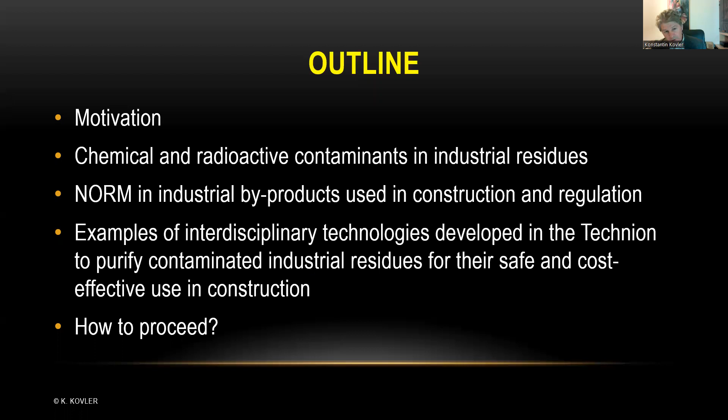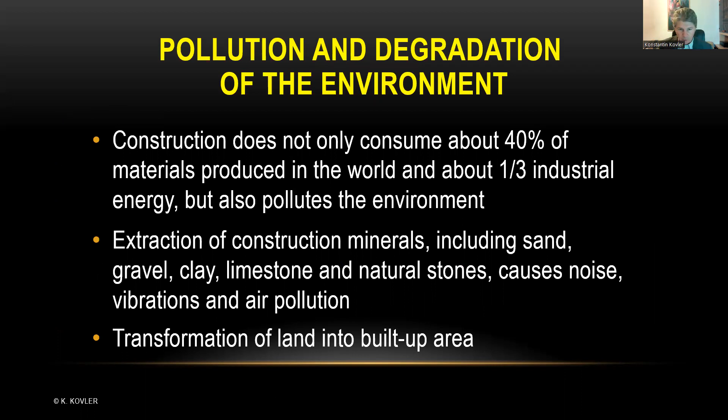Motivation. Let's start with the pollution and degradation of the environment. We know well that construction doesn't only consume about 40% of materials produced in the world and about 1/3 of industrial energy, but also pollutes. Extraction of minerals results in noise, vibrations, air pollution, transformation of land.

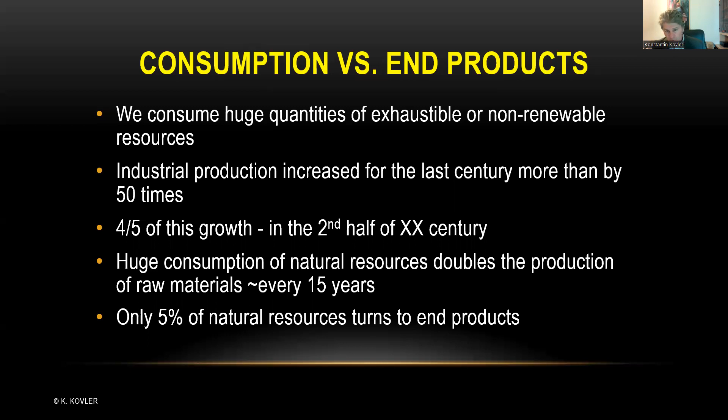Don't forget, consumption versus end products. Yes, we consume huge quantities of exhaustible or non-renewable resources, we know it. Industrial production increased over the last century by more than 50 times, and most of this growth happened in the second half of the previous century. Unfortunately, only 5% of natural resources turns to end products, and the rest goes simply to waste, often ecologically harmful and unsafe. I will discuss in my presentation why recycling is not so easy and what are the pros and cons.

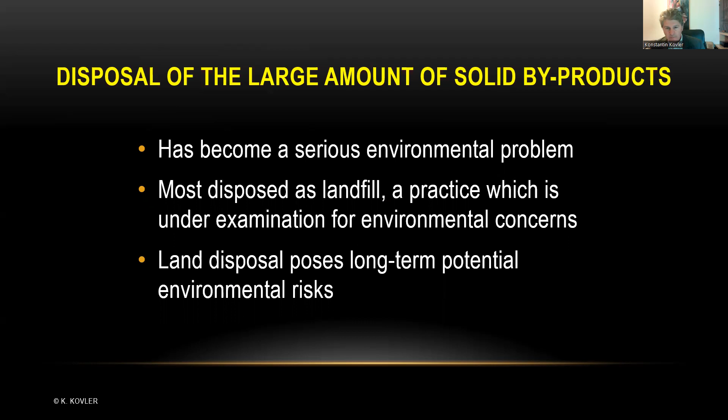Coming back to the disposal of the large amount of solid byproducts. It has become a serious environmental problem. Landfilling is problematic. It's a practice which is under examination for environmental concerns, and land disposal poses long-term potential environmental risks. Our opinion is simple. This waste should more likely be regarded as resources placed in the wrong place.

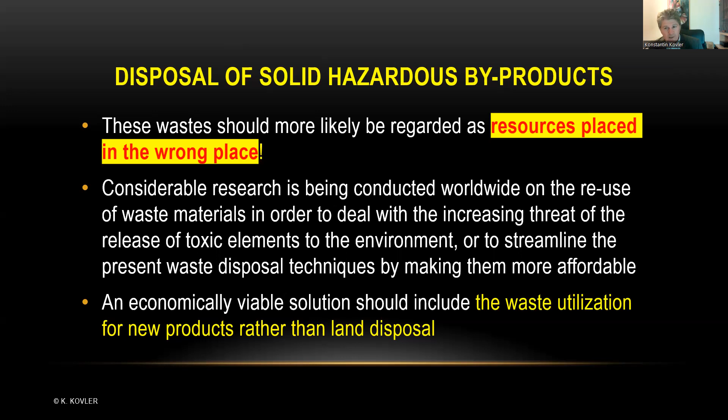So considerable research is being conducted worldwide on the reuse of waste materials in order to deal with the increasing threat of the release of toxic elements. And economically viable solutions should include, of course, waste utilization for new products rather than land disposal. The best way, of course, to handle this toxic industrial waste is to avoid generating it.

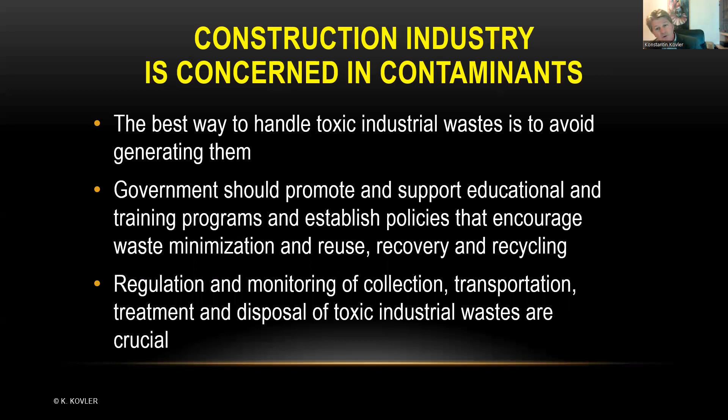Of course, government, we suppose, should promote and support educational and training programs and establish policies that encourage waste minimization, reuse, recovery, recycling, and also regulation and monitoring of collection, transportation, treatment, and disposal of toxic industrial waste are simply crucial.

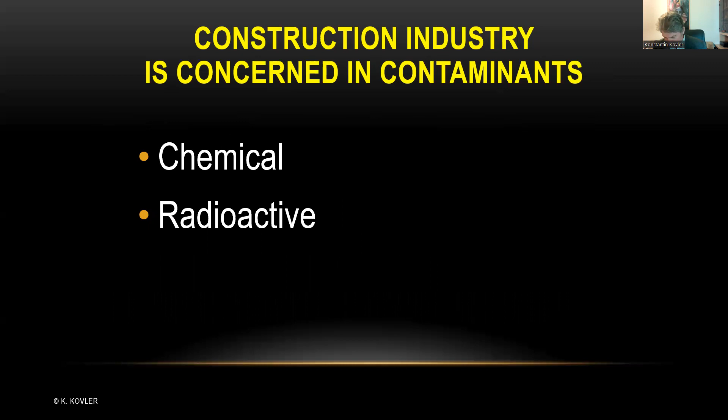Let me speak in more detail about chemical and radioactive pollutants. I will focus on radioactive because very often it's much easier to get rid of chemical pollutants than radioactive. NORM. NORM has a double meaning. Norm is a norm, normative, and NORM is an abbreviation of naturally occurring radioactive materials.

Natural radionuclides derive from rock and soil, and many mineral materials are extracted from the earth, from the rock and soil, and used in construction. I'm not speaking about polymer, wood, and metals; I'm speaking mainly about mineral materials. In the uranium series, the most important and most popular reference is radium. So this disintegration chain of uranium is often called the radium chain.

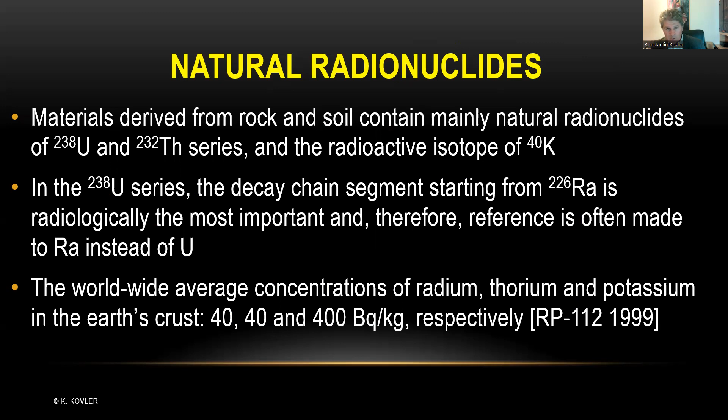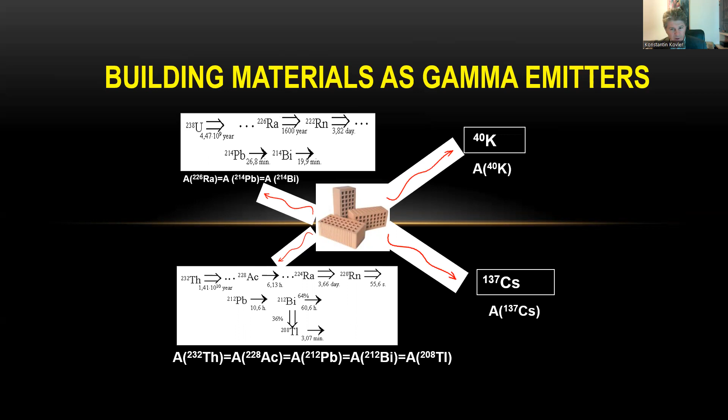The worldwide average concentration of radium, thorium, and potassium in the Earth's crust is 40, 40, and 400 becquerel per kilogram. And building materials are considered gamma emitters because they contain all of them in different proportions, of course. And in some places, mainly in the zones close to the Chernobyl disaster, in Belarus, Finland, the regulation also addresses cesium-137 concentrations. So we are speaking about natural origin and industrial byproduct materials.

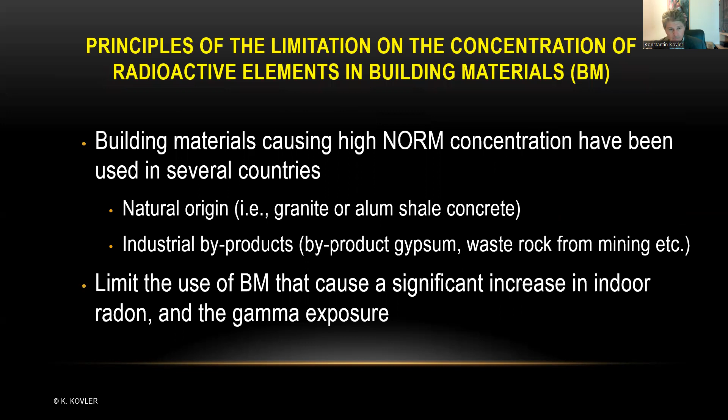And the task of the regulators is to limit the use of materials that cause a significant increase in gamma and also in radon. Because radon, we can breathe it. It's in the middle of the disintegration chain of uranium, and it's the only gas. The rest of the uranium disintegration chain is metals, aerosols.

Enhanced radioactivity is observed in many different types of byproducts, because after some chemical or thermal treatment, the concentration of inorganic matter, including heavy metals and including radioactive metals like radium and thorium, is increased. Among them, slag, different kinds of ash, phosphogypsum, and red mud.

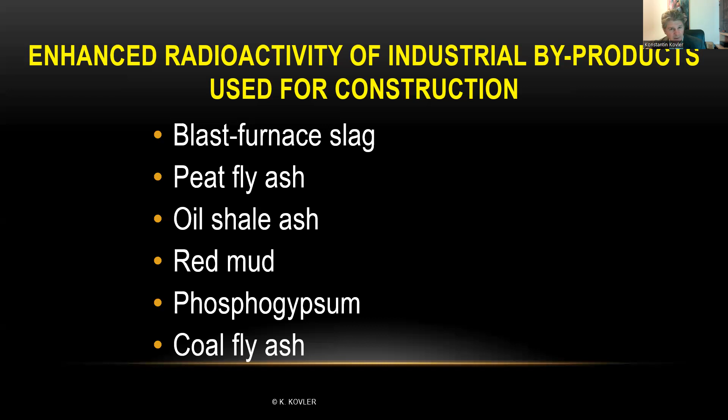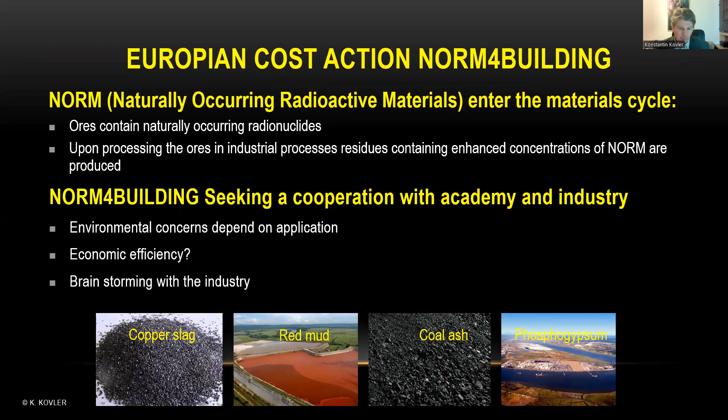Recently finished project I took part in, called NORM4BUILDING, addressed different kinds of industrial products contaminated with NORM. We published a book, I think it's a good book, very popular now, which is called NORM4BUILDING.

Please look at the table taken from one of the European documents, RP 112, and look at the bottom of the table, listing 3 types of industrial byproducts: phosphogypsum, blast furnace slag, and coal ash. They contain much, much higher concentrations of radionuclides than most common building materials in the upper part of the table.

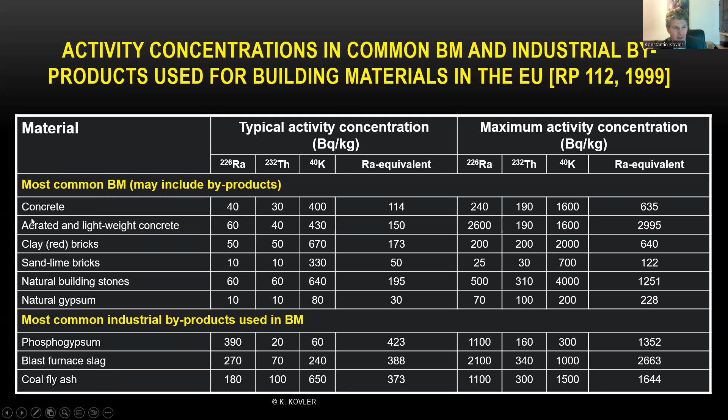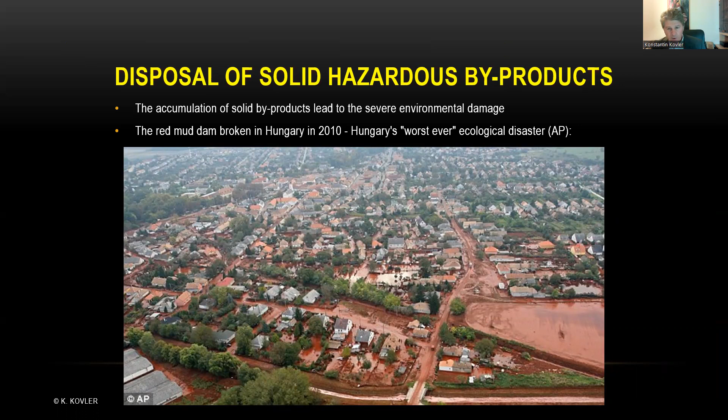Disposal of these solid hazardous byproducts can lead to severe environmental damage, like what happened in Hungary in 2010, the worst ever ecological disaster, when a huge territory of Hungary was simply flooded by this toxic byproduct. Red mud is a highly alkaline residue of the bauxite industry.

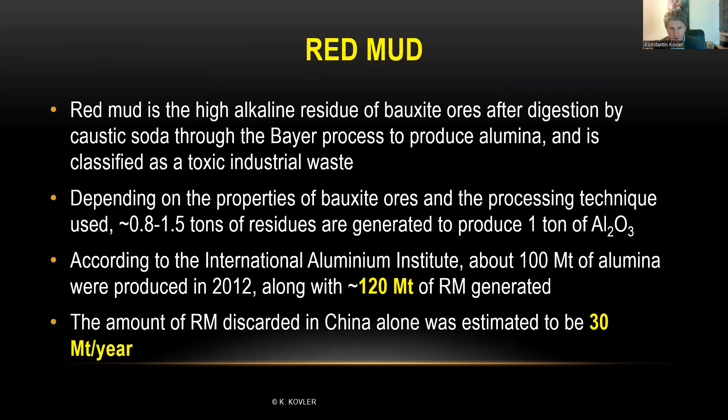And look at the numbers. Only in China, the amount of red mud discarded is estimated to be more than 30 megatons per year. It's not only in China and Hungary, it's also in many other countries, in Australia, in the United States.

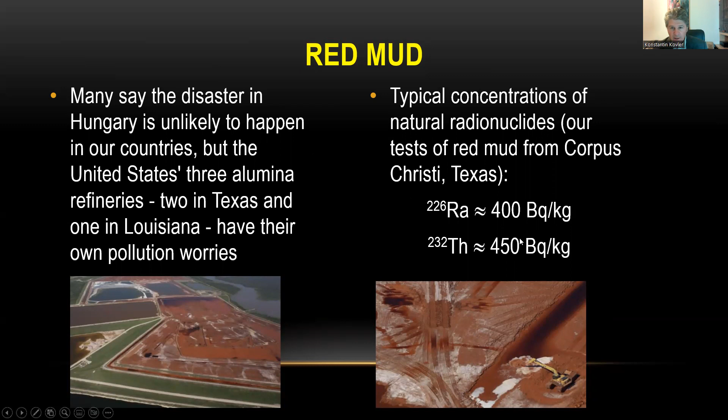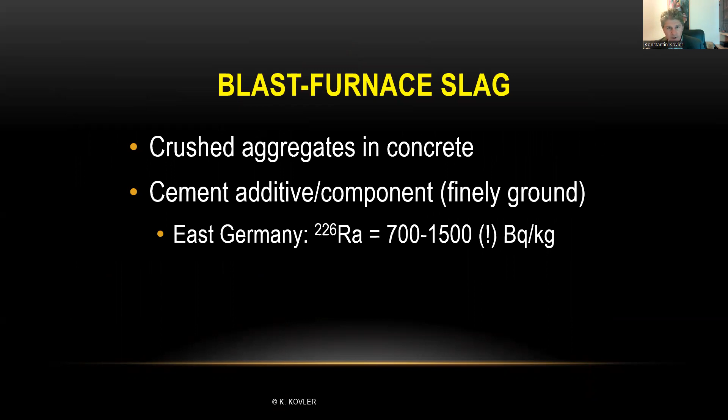We dealt with one of the sources. The sample was sent to us from Texas, and you can see it has elevated concentration of radium and thorium. Blast furnace slag sometimes also has contamination, radium.

And finally, phosphogypsum, which is a very painful problem for all mankind, because fertilizers should be produced more and more every year, and phosphorus is a very important, vital element for agriculture, together with potassium and nitrogen.

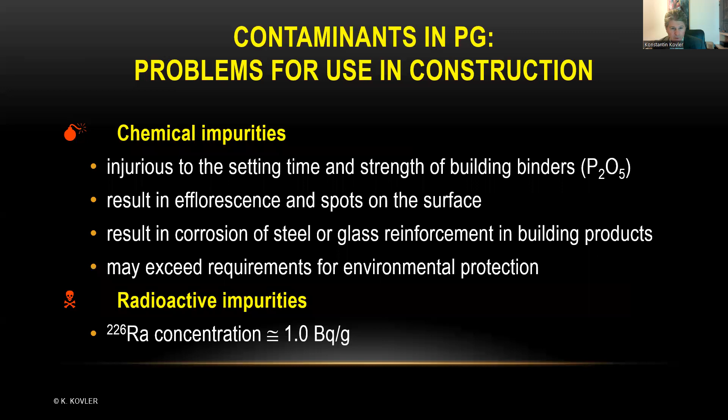Phosphogypsum, unfortunately, contains chemical and radioactive impurities. Chemical impurities are injurious to the setting time and strength of some building binders, and result in efflorescence and corrosion of steel. Radioactive impurities are coming mainly from radium, which is elevated. Look at the quantities - like in red mud, we are speaking about enormous amounts, billions of tons.

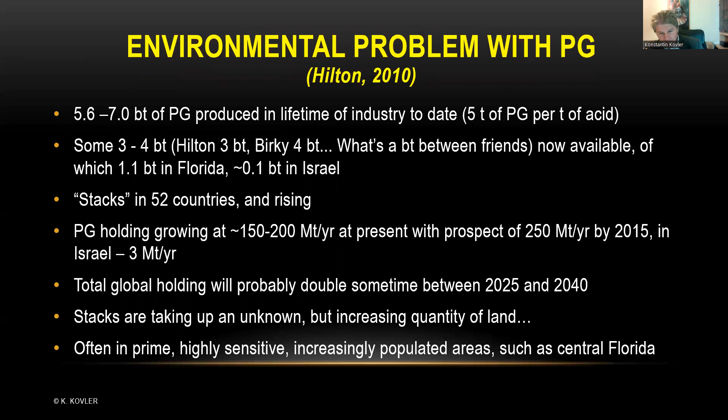Current solutions existing in the literature are based on separation by grain size, but you can compare the phosphogypsum in different fractions - there is no big difference. This is not a radical solution to separate the fractions. It doesn't help too much.

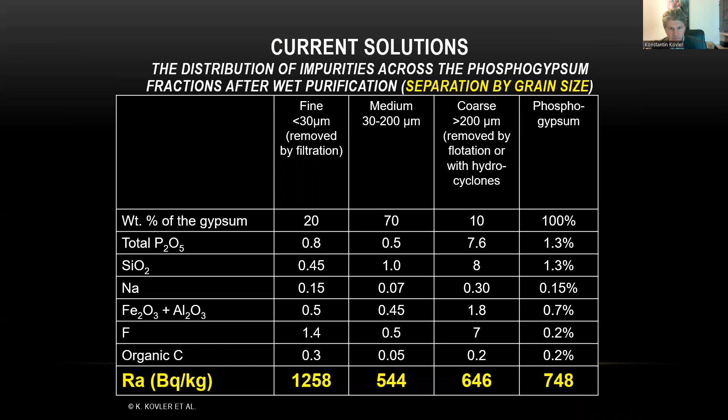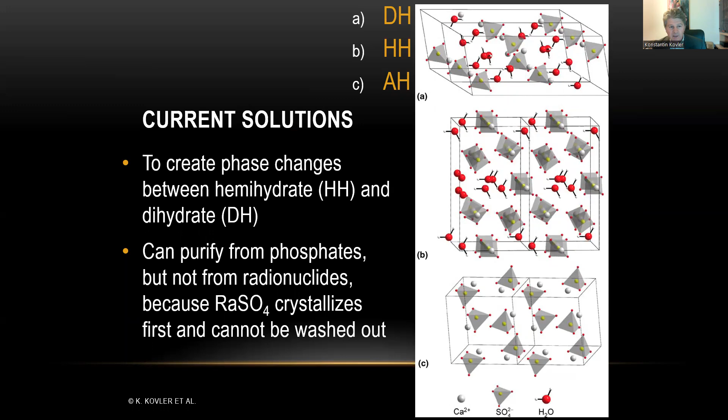Other solutions, many of them, are based on phase changes, moving from one type of hydrate to another - dihydrate, hemihydrate, anhydrite of calcium sulfate. But unfortunately, as we understood, it can purify from phosphates and maybe from some other chemical contaminants, but not from radionuclides, because radium sulfate, which is responsible for radioactivity, crystallizes there first and cannot simply be washed out from the surface of the crystals.

Our proposed research is based on chloride complexation with radium to prevent precipitation of radium salts. By the way, the high chloride concentration agent, which in our case is calcium chloride, is recycled, so we don't consume too much of this agent. This is a very cheap agent, by the way.

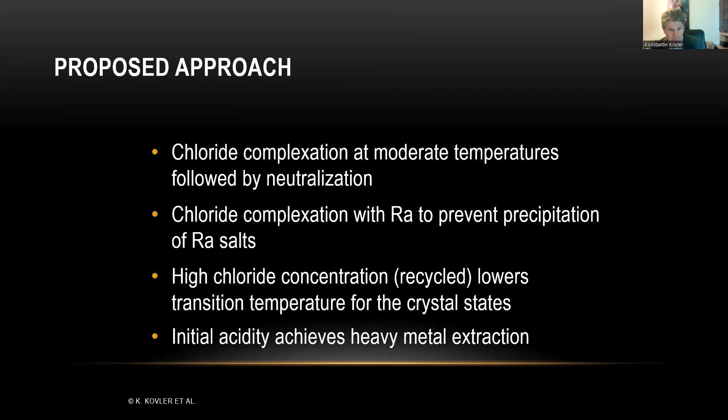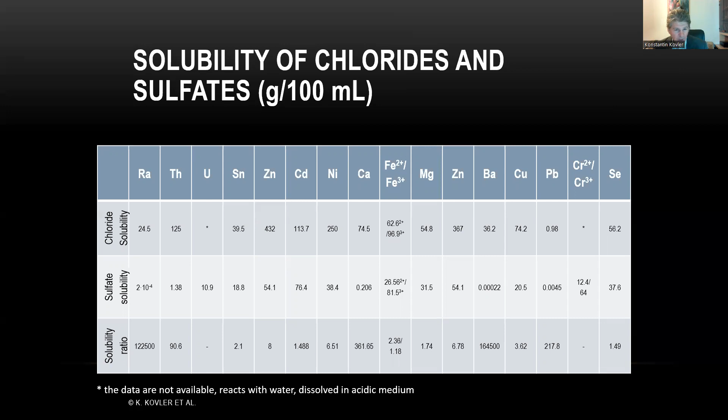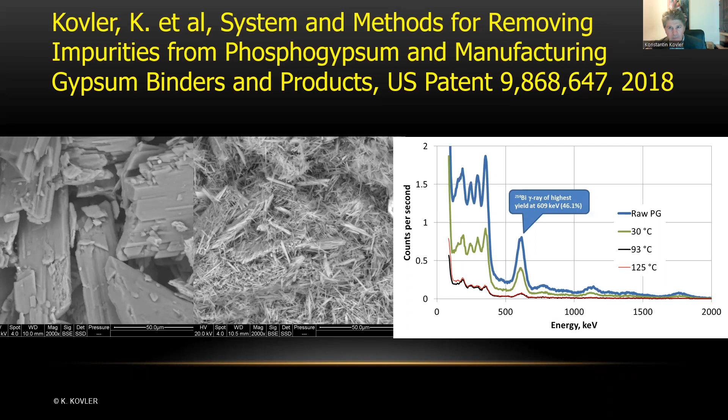And it was done by a complex treatment based on thermal processing, but not under high temperatures. Look at the temperature on the right side of the slide, and phase changes, and also agitation - it means a complex mechanochemical treatment. This is part of our patent.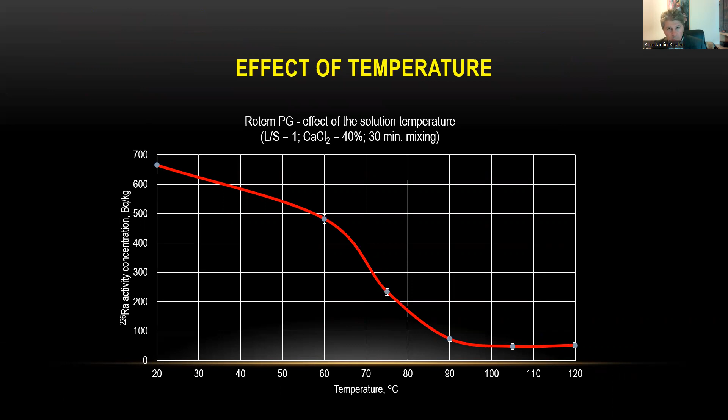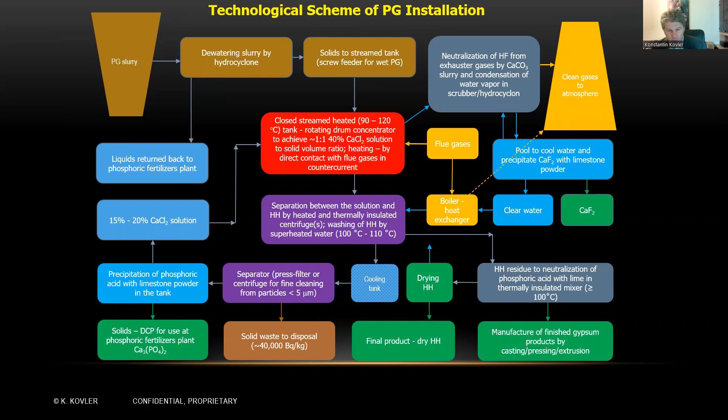So we studied the effect of chloride concentration, we studied the effect of temperature. We understood well what are the optimum parameters, what is the effect of calcium chloride, what is the optimal concentration of calcium chloride in solution. And then we proposed for the industry, for one of the plants, this scheme of producing environmentally safe and cost-effective products for construction.

Now let's ask ourselves, what are these contaminants? Are they contaminants or valuable elements? When we recover these contaminants, we call them contaminants in construction, but for other industries they consider them very valuable elements - rare earths, radionuclides, radium-223 very valuable for radiopharma, phosphates, fluorides.

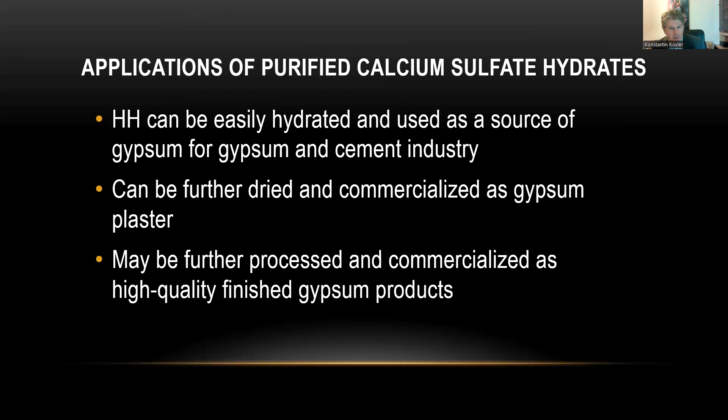Applications of purified calcium sulfate hydrates are many: dihydrate, hemihydrate, anhydrate, binders.

One of the important issues is what to do with the disposal of removed contaminants, because the concentrations are getting high, and then we need to dispose of them. So we used different approaches in our research. Fine fraction of gypsum can be useful, though of course some gypsum is lost. Zeolites, both natural and artificial, are good. Geopolymers too.

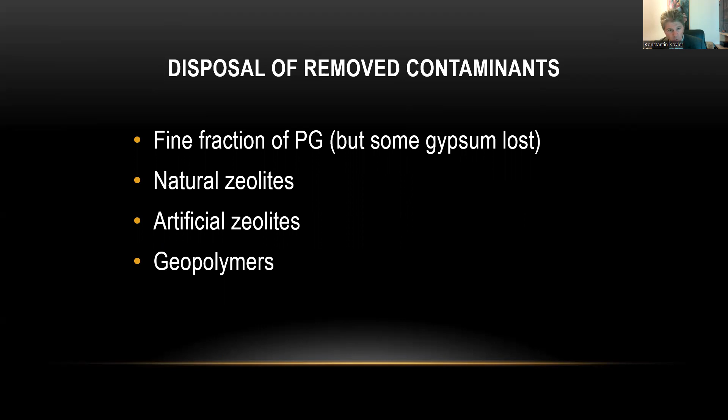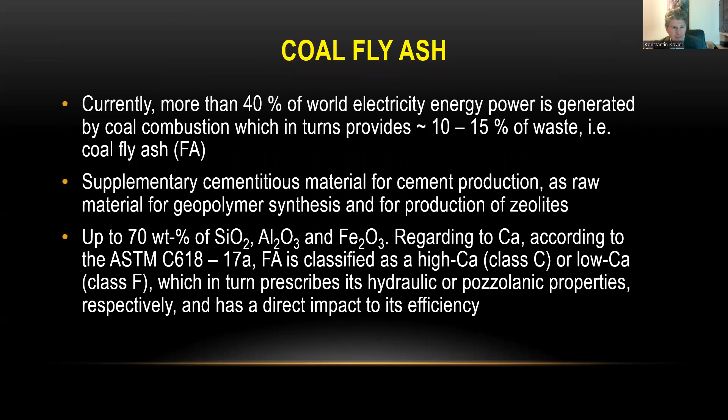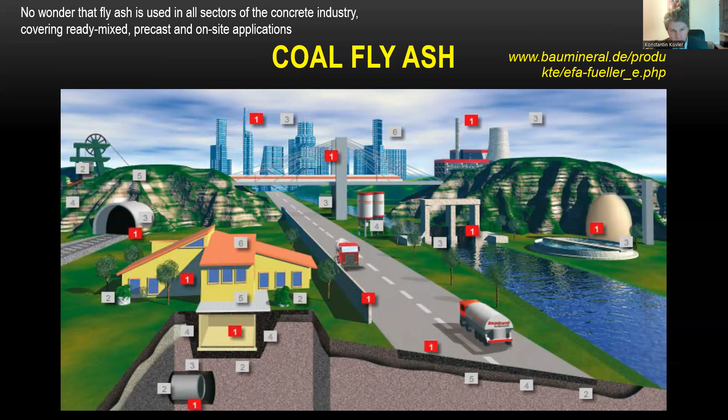A little bit about coal fly ash, which is a very popular byproduct, but considered mainly as a resource in construction. We know it. Coal fly ash production in several countries, like China and Poland, is still increasing. We have so many nice examples of using coal fly ash in the concrete industry - ready-mix, precast, on-site applications.

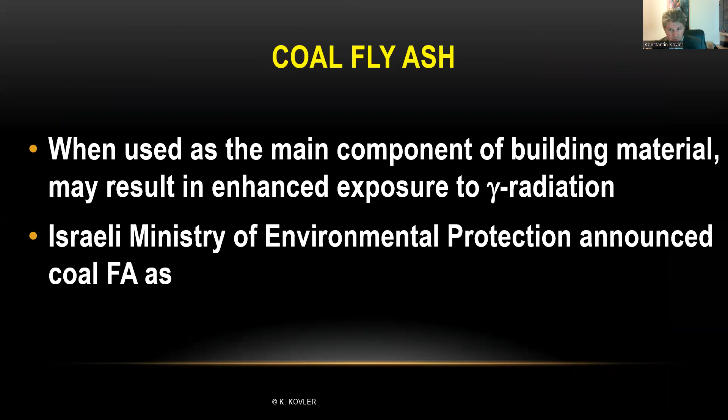But when used as the main component of building materials, it may result in enhanced exposure to gamma radiation. The Israel Ministry of Environmental Protection, our regulator, announced coal fly ash in 2008 as radioactive waste. Of course, this is not waste.

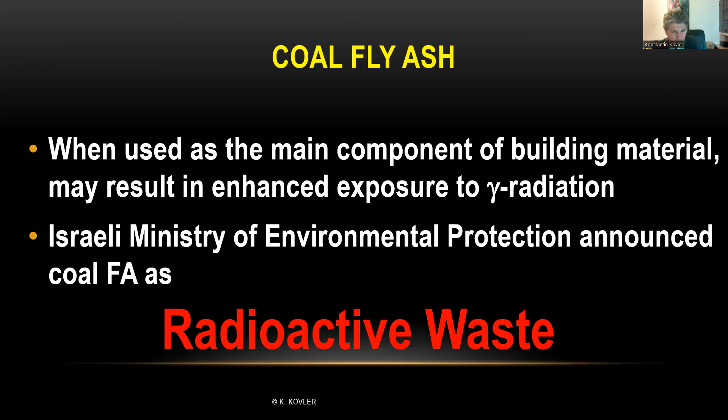It's against all the international laws and norms - European, international, and even national. And then you can imagine what happened in the local construction industry. All the industry was in deep shock after years and many efforts of educating the industry on how to promote different recycling solutions for coal fly ash.

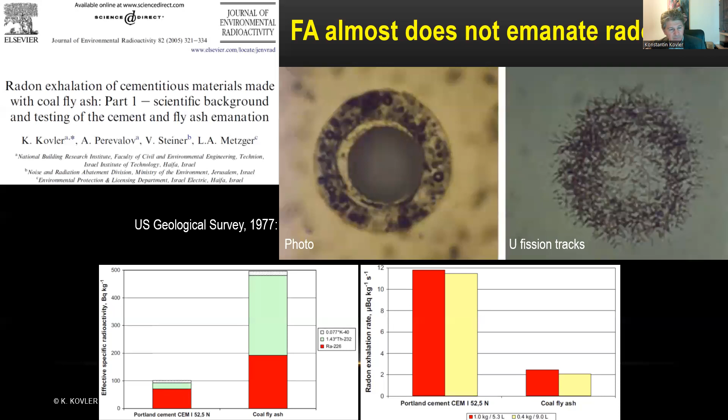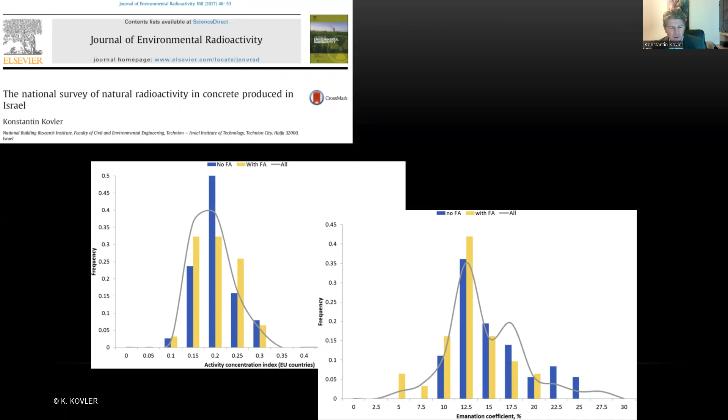We studied in depth the effect of natural radiation, comparing different materials - concrete containing and not containing fly ash. We came to the conclusion that the total radiation dose from both gamma and radon is almost the same, because radon emanation is much lower. It's very difficult for radon atoms to escape the very dense, glassy structure of the fly ash particles formed under high temperatures in the thermal plant.

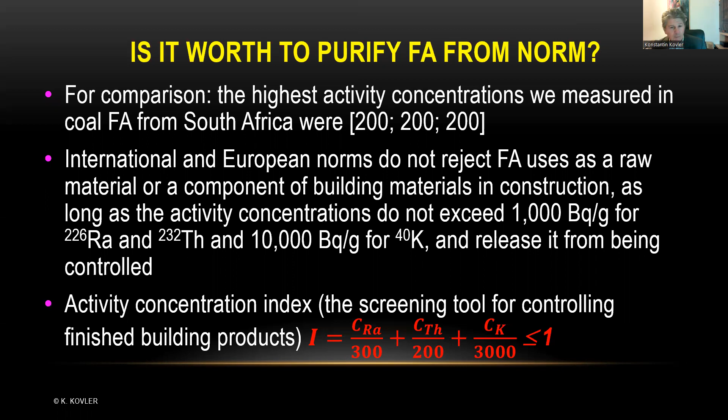The next question we asked ourselves is: is it worth it to purify fly ash from NORM? And in the meantime, the answer is no. We are not at this stage.

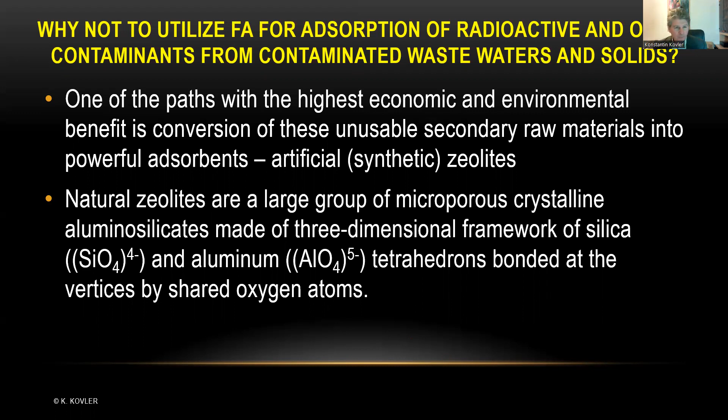Another research we've done was: can we utilize fly ash for adsorption of radioactive and other contaminants from contaminated wastewaters and solids? And not only fly ash, by the way, also red mud. But for this purpose, we need to produce somehow the zeolites, so we have to move from the amorphous structure of fly ash to the crystalline structure of zeolites.

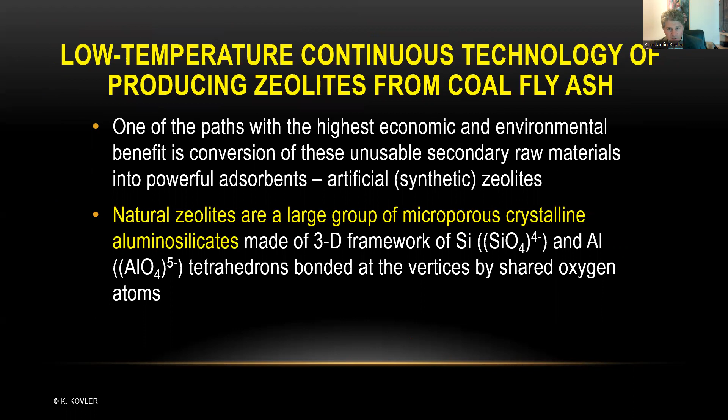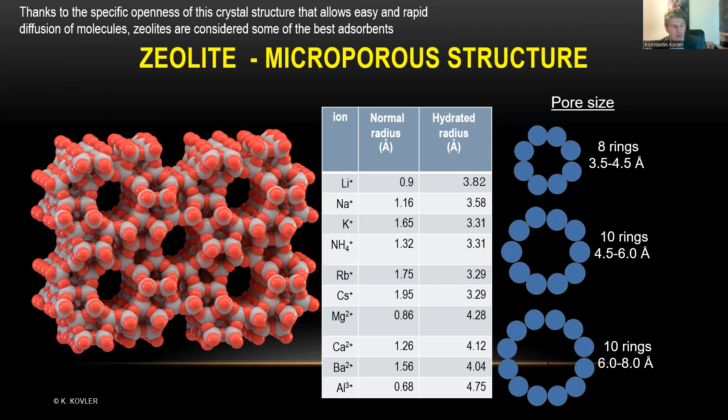Zeolites, just to remind you, are a large group of microporous crystalline aluminosilicates made of a 3D framework, like you see in this slide. This structure is unique - please look at the radius of the atom. So it can be effectively used for adsorbing contaminants, different kinds of ions, heavy metals, including radium and thorium. Why not?

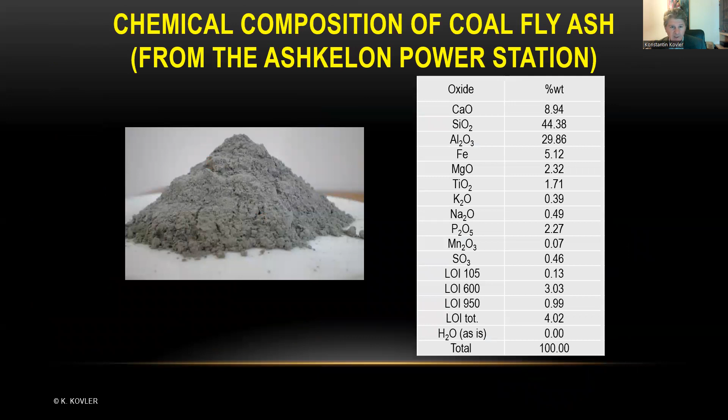Many projects are running in the world producing artificial zeolites from coal fly ash, using different technologies. Our technology is a little bit different. This is the material we used in our experiments, a composition of our fly ash, and we successfully produced artificial synthetic zeolite which was very close to the natural one.

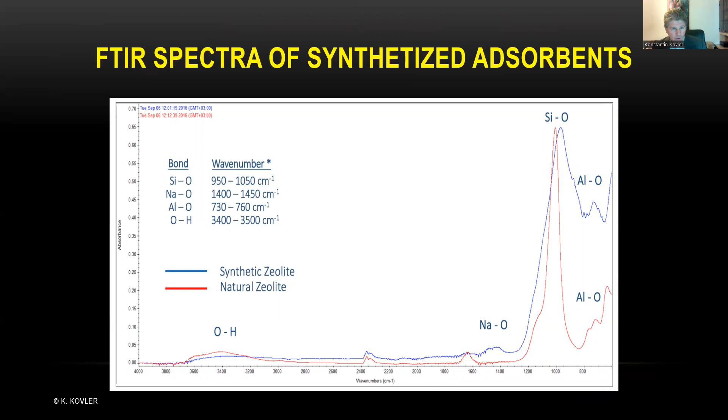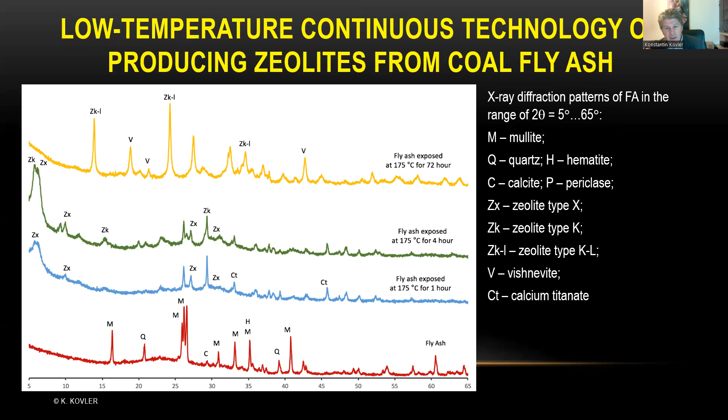It is helpful to adsorb ammonium ions, adsorb lithium, and please look at the temperature - relatively low. What does it mean, 175? It's not a very high temperature, so consumption of energy is minimum. And by the way, our technology is continuous, in contrast to the batch-based technologies used in other labs.

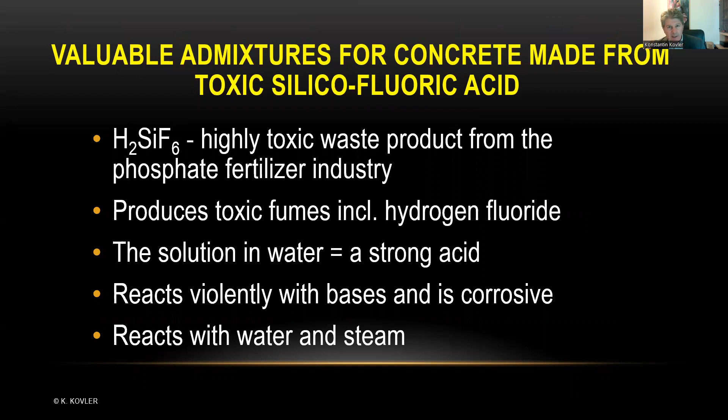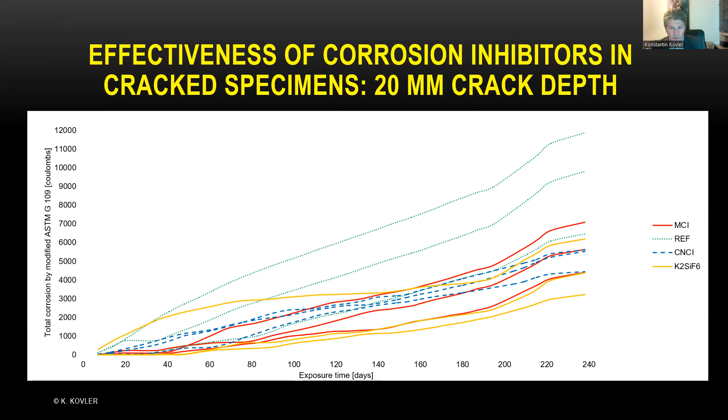One more example: valuable admixtures like corrosion inhibitors made of very toxic silicofluoric acid, a byproduct of phosphate fertilizers. This is the result of the last project we've done at the Institute, using one of the salts of silicofluoric acid, potassium salt, in comparison with other known corrosion inhibitors - organic MCI and inorganic CNCI inhibitors. Look at the total corrosion - it's minimum with this corrosion inhibitor.

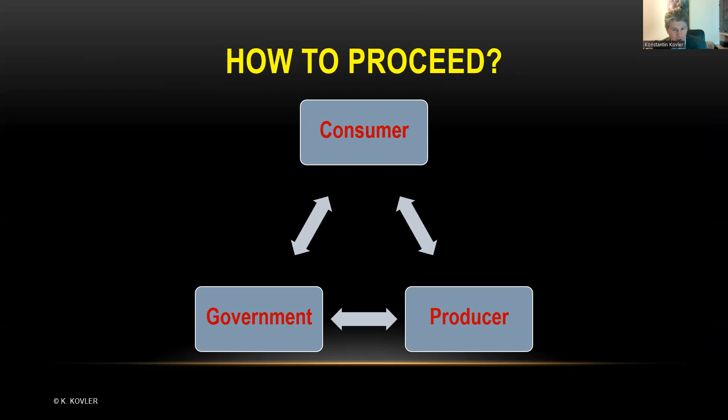I would like to finish my presentation with a question: what to do in the future, how to proceed? The answer is simple, but very difficult to achieve. We need, first of all, to establish a common language and cooperate between these three blocks in this triangle diagram: consumer - we are all consumers, by the way; government, which is responsible for environmental protection; and producer. Yes, we need to take care of the interest of the producer.